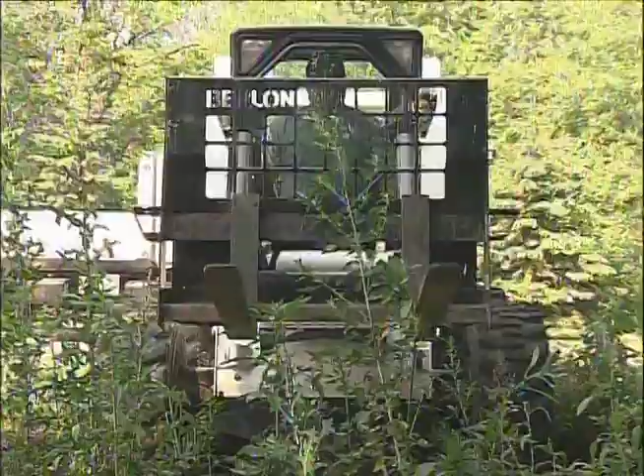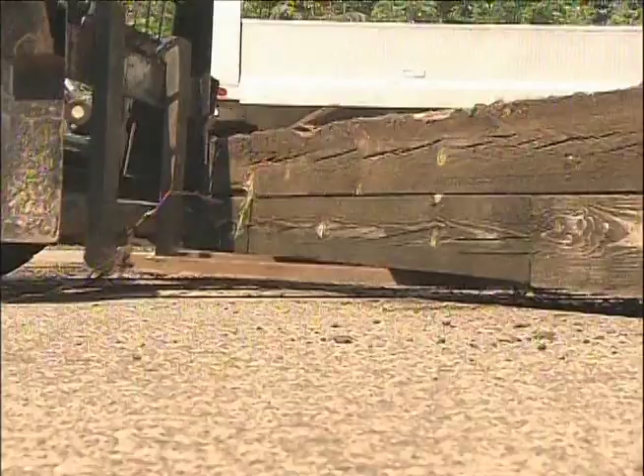The most important part of this area for me is to have a nice area to plant the vegetables in. Pam has already told me that I've ruined her vegetable growing season, so the sooner I get this behind me, the sooner she might forget. Well, Steve's been a buddy of ours for years. In fact, he's worked on a lot of our projects. First time we've worked on his yard, though, so it'll be kind of interesting to see what he's got cooked up.

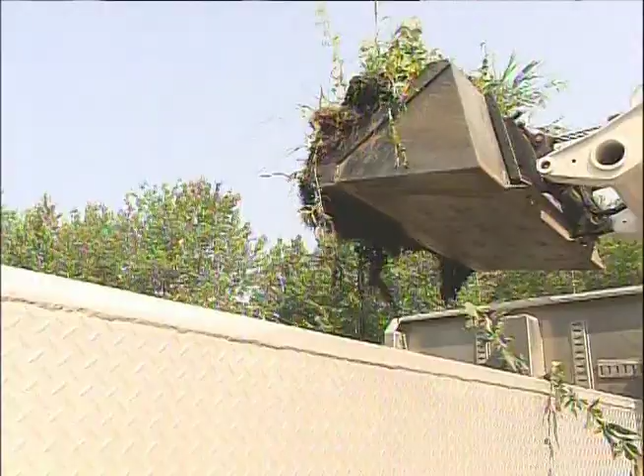We've already removed the planters. Once we get all the sod and the planting stuff out of here, we'll start excavating to get the base material in. Pam and I decided that this is kind of the basic design. The main area here is going to be concrete pavers. We've got a V-shaped three-tiered planter, and we'll incorporate a boulder right in the crotch area or the V area of the planter.

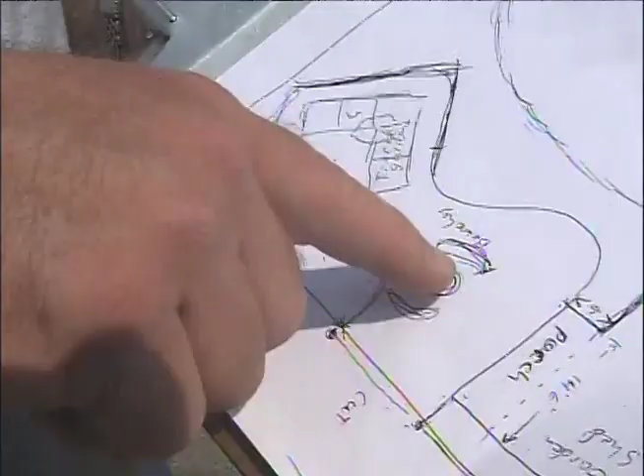Here we're going to be doing a round planter with a gazebo over the top. Somewhere over here we're going to end up with a fire pit with some seating benches around it. Once we get the pavers laid out, we're actually going to be setting in natural stone slabs. It'll help break up the continuous look of the pavers.

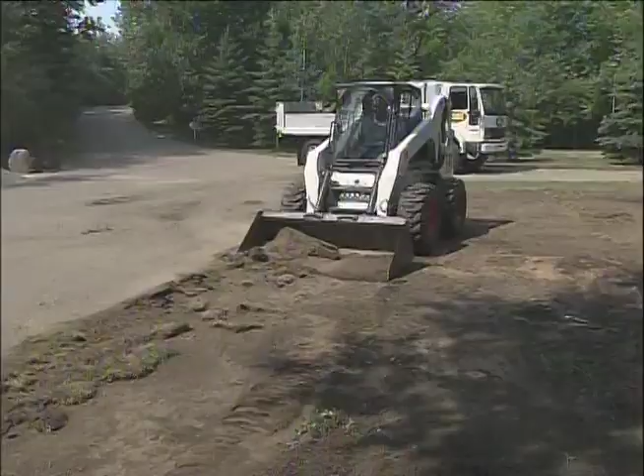This area always looks kind of scruffy. The grass is always dry over here, and making it into more of a seating area, a play area for the dogs, and just overlook the pond will be very nice. Well, once we get all the sod ripped off the top here, then we'll lay out exactly where the planting bed's going. If I know Steve, he'll probably be out there with a red spray can, laying out exactly where it's at so he doesn't have to over-excavate for the base.

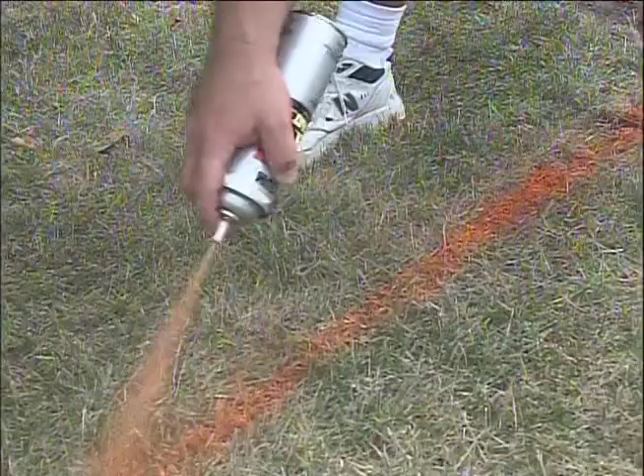Well, it's always good to get your layout done so that you really have a plan to work to. Since this is mostly freeform and there are no right angles, no perpendiculars or anything for us to worry about, we're going to go ahead and just freeform the entire perimeter of the patio. I know at one point we were laying this out yesterday wondering how Steve's going to do it, and he says, well, one thing is I got to check with my wife, because like Judd always says, if mom is happy, everybody's happy.

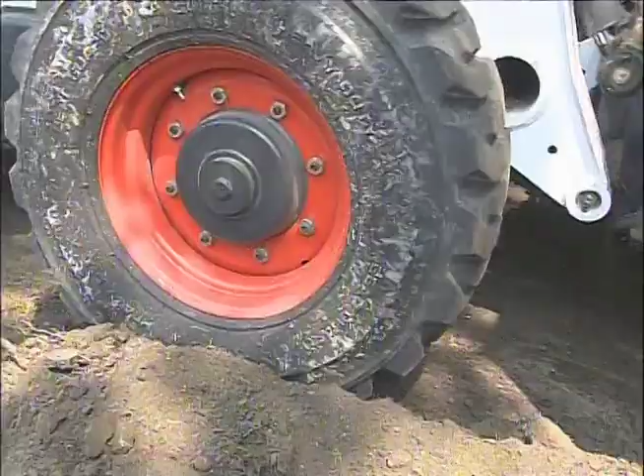It's not a bad soil here, so for the excavation we'll be looking to do about 6 inches of base, so it'll be a total of 9 inches of excavation. Drainage is always the biggest issue with any kind of pavement, so we want to make sure that we have a minimum 2% grade to make sure it sheds water properly.

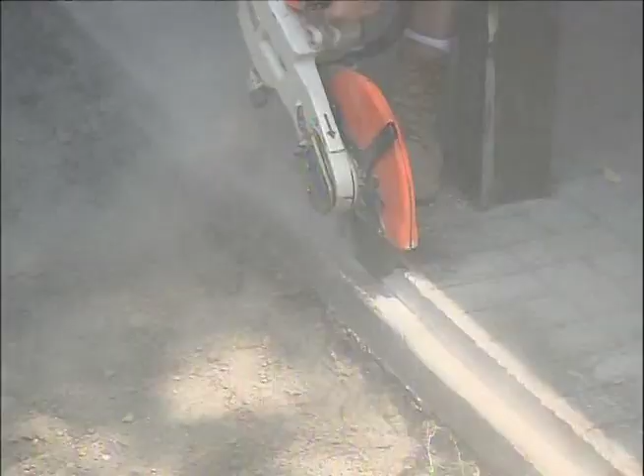Well, a couple things had to be done here before they're ready for base. One is a little bit of a surprise. There was a concrete ledge sticking out here underneath this patio, so they scored the top of that and busted that off. Another thing they want to do, they've snapped a chalk line. They're going to cut this edge of the driveway right here so that it lines up with the existing paver patio. Nice job, Steve.

Hey, they had to know they couldn't keep me out of these toys today. We got this sweet dump truck, big aluminum box, Steve running a state-of-the-art skid loader, laser levels. I'm in heaven, baby.

Okay, we've got everything excavated. Now we're ready to move on to the base. Now, one thing I know about Steve, he totally believes in good firm foundations for these patios. So putting in a good base is something he's not going to gloss over.

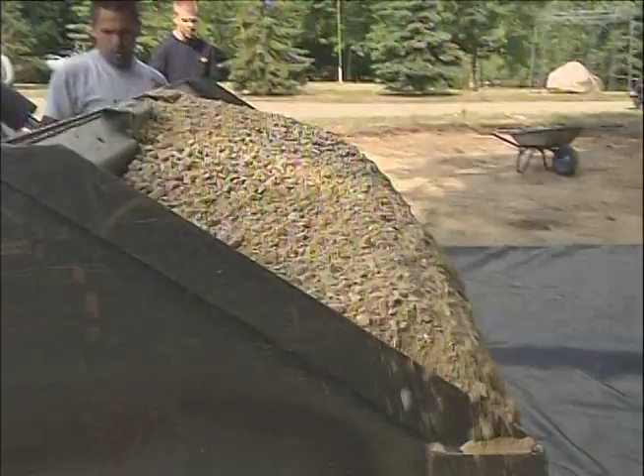We like to use a woven geotextile fabric. That material really helps spread any uneven loads you may get from the subgrade during freeze-thaw conditions or any unexpected load. As you put multiple pieces of geotextile together, you want to make sure that you shingle it or overlap a minimum of 12 to 18 inches because that's what continues the transfer of load.

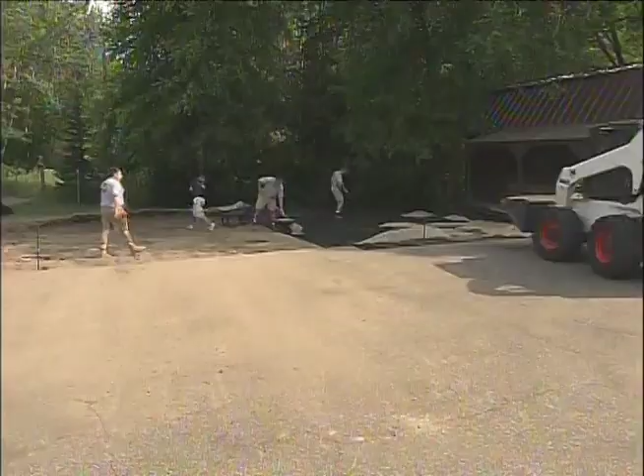We're using 3/4 minus for the base. We're spreading it out right now just to hold down the fabric. Once we get this intact and in place, then we can start spreading this out evenly throughout the whole area. It's a crushed limestone. It's got fines and materials up to about 3/4 of an inch. What that does is it binds together really nice. The one thing it's going to require us to do in this very hot and sunny day is that we're going to have to add a lot of moisture to it in order to get it to compact properly.

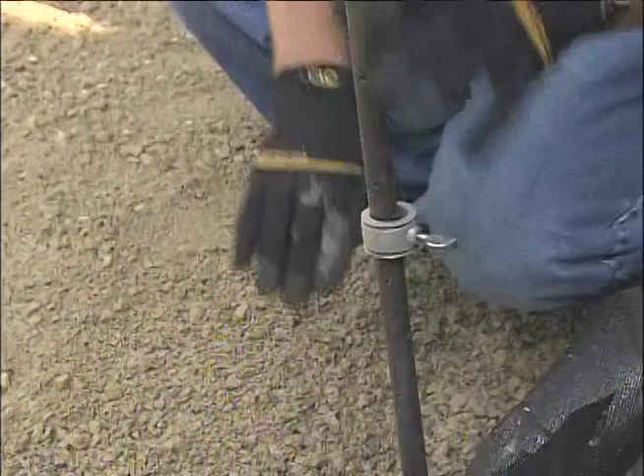Now once they get the base spread out, they want to double check to make sure they're pretty close to where they want to be. So to determine that, they put these stakes around the perimeter. They have these little collar ties that represent 12 inches above where that final patio level should be. So to determine where the grade is at, they measure down 12 inches plus 3 inches for the width of the paver, string some lines. Back on the back side there, they're probably just a little high, so they're going to scrape some of that off. Up here in front there, they're pretty darn close.

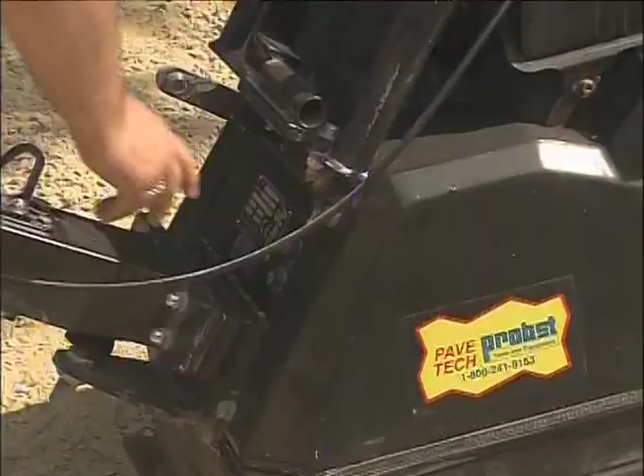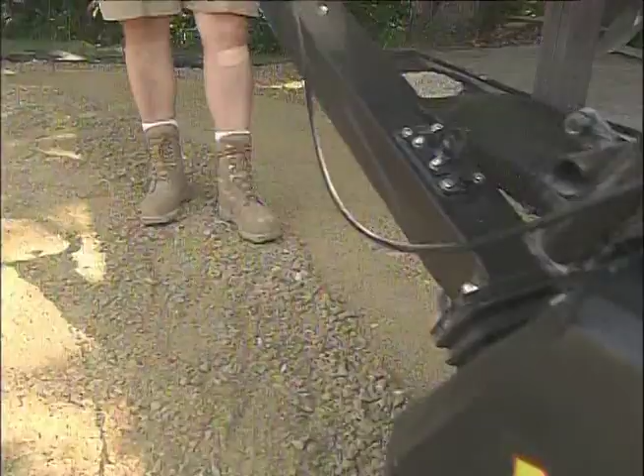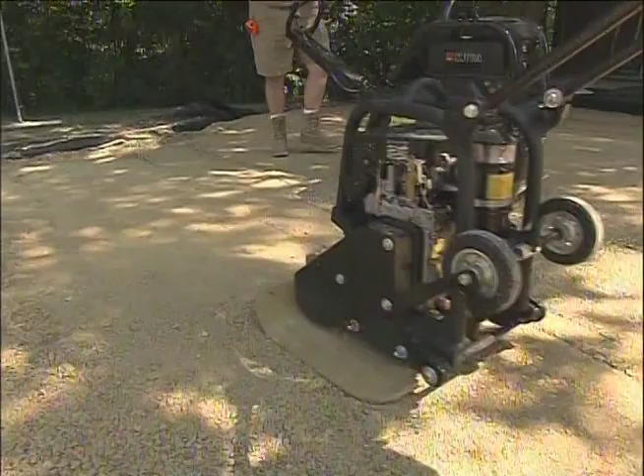Now you want to compact the base so you get a nice strong foundation for the patio, and it levels everything else, so we're all ready for the pavers. Compaction is probably the single most important process in putting a segmental pavement together. It's the foundation, it's what everything's built on. It's important to make sure that during the compaction process you're raking down the high spots and filling in the low spots as you compact, just to make sure that you're getting uniform compaction and you maintain that initial grade you got with either the rakes or the bobcat.

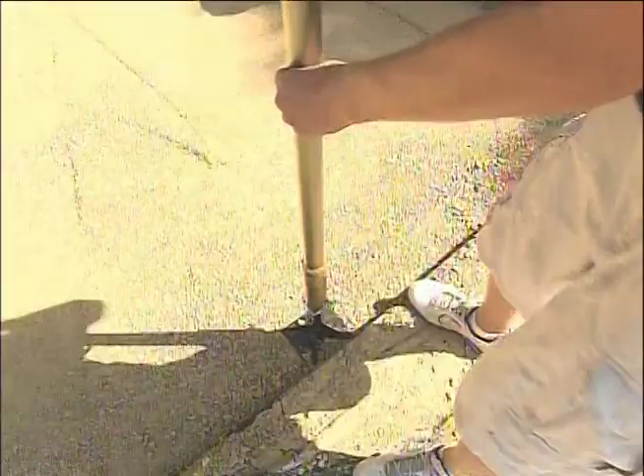Well, things are well underway now. We'll let them wrap up this part of the operation, then we'll be back to start working on planting beds and benches. Some details in this are a little bit more intricate, but pretty much this is pretty standard fare for a retaining wall project.

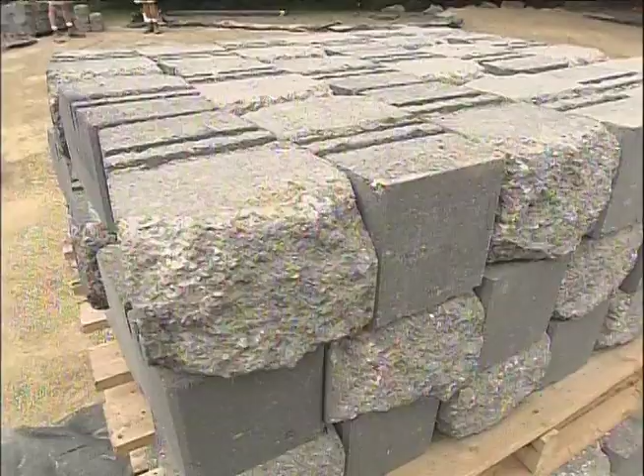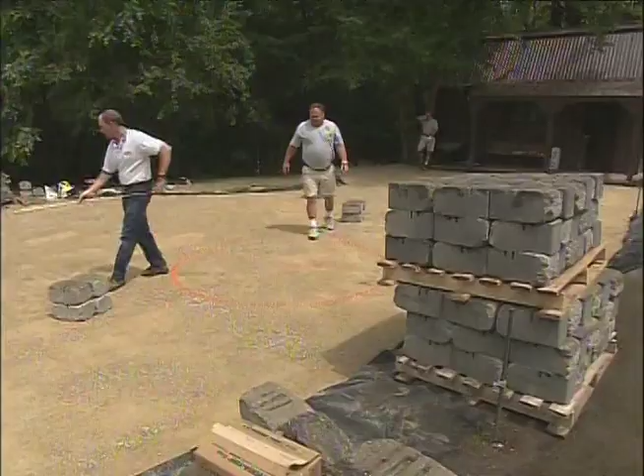All right, most of the base is set, ready to go for our paver patio. But before we get to actual pavers, we're going to raise some planting beds with some retaining wall block. Now this area here has been set a little bit lower and pretty much flat for that. There are a couple of points that we're going to have to make sure get consistent. We've got a couple of walls that are paralleling one another, so it'll be real important to make sure that those are parallel and also level in the same plane to one another as well.

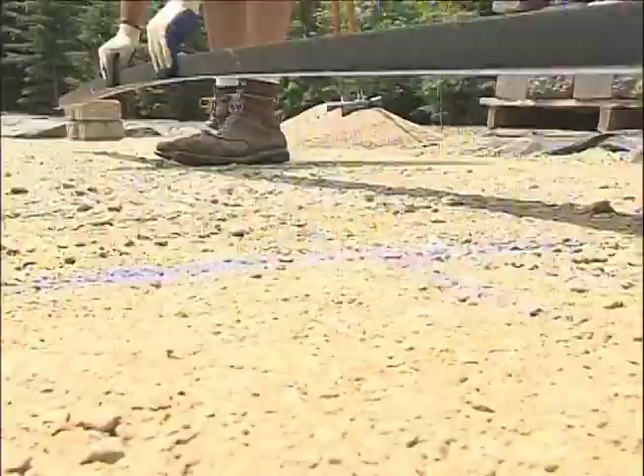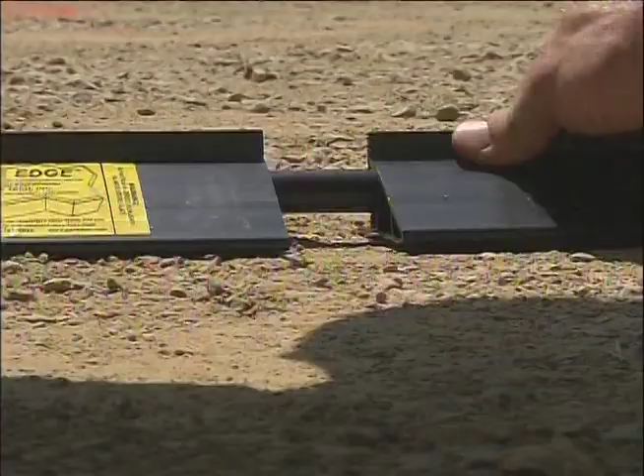We are huge believers in using edge restraints to help keep a paver patio locked into position. But Steve also recommends using edging to help hold a retaining wall in place while you are stacking the stones on top. It actually reduces the amount of excavation and base preparation necessary for the retaining wall. Again, it saves a lot of material too, because it requires you to bury less of the material below visible grade. So it does save time, it saves money, and it's quicker.

Now what we're using is a concrete retaining wall block, which has been given a tumbled or weathered look on the exposed edges to give it the look of natural stone. Now, they're about half the size of your typical unit, but they are still 41 pounds, so they're nice and heavy for applications like garden walls and retaining walls. They're also pre-grooved and drilled so that you can put them in a variety of configurations, which you'll see in a little bit here as we start to lay the stones.

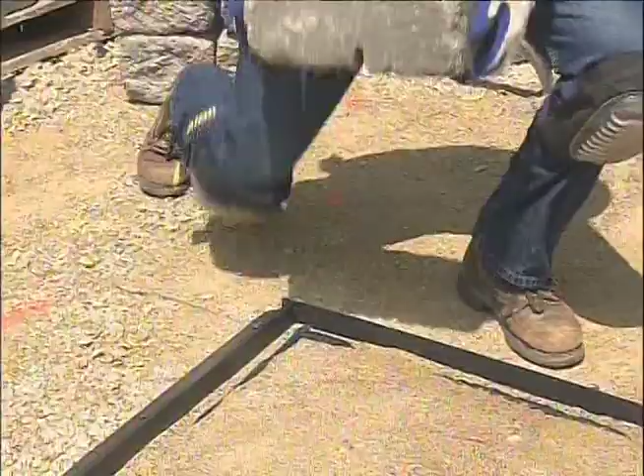We chose this material because it is easy to work with. It's small enough for us to do all the design features we want, and the fact that it's a solid block gives us a lot of ability to cut and fit pieces to make it look really nice.

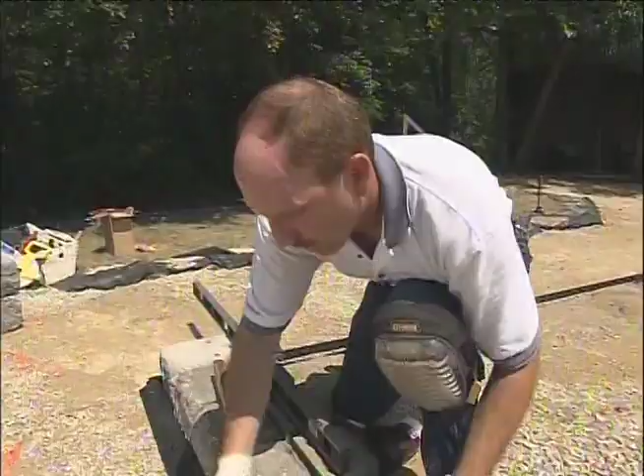Now Jay likes to start in the corner and work his way around. Ready? So that's what he's recommending here. Now with any retaining wall that we've ever done, the first course is always going to take the longest because you need to make sure that every single stone is perfectly level and straight, otherwise you're going to run into problems later on. We start in the corner of a project because it makes things a little bit easier. This will be a fixed point for us now.

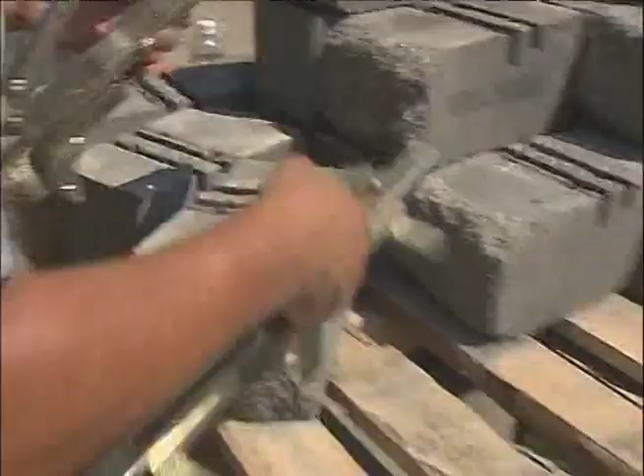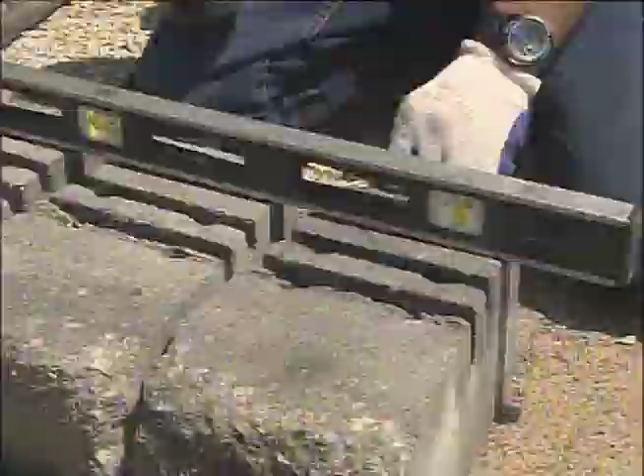You normally start in the lowest portion of your wall and also in any corners. We've split a standard Versa-Lok block in half to give two textured faces, an 8-inch side and a 12-inch face. In addition to the Class 5 base, we also are using a little bit of washed concrete sand as a skim coat, if you will, to aid and speed up our basing operations. It's very thin. We just spread it out very thin to take care of any low and high spots.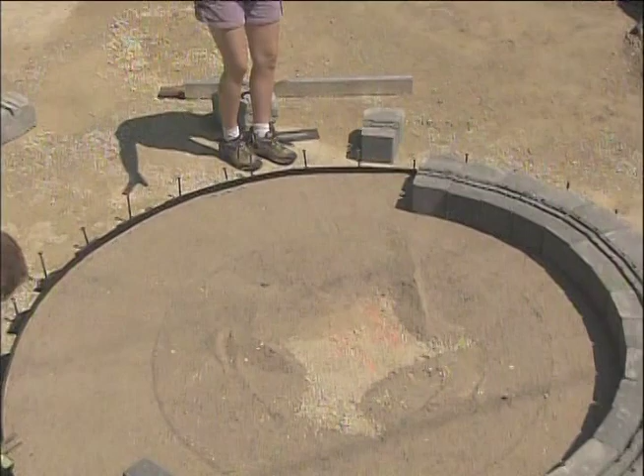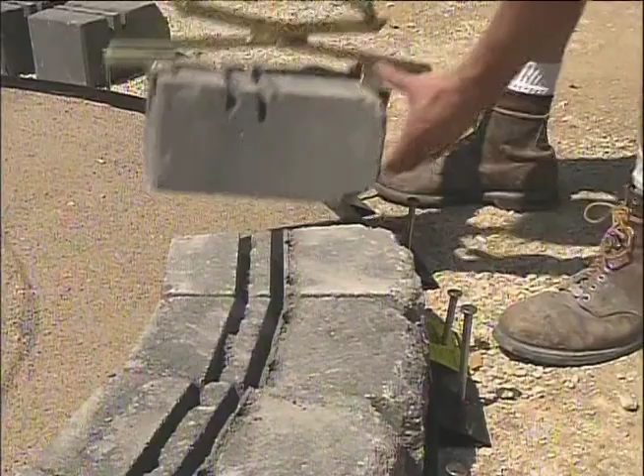Well, the first bed we had multiple corners, but here no corners at all, just one big circle. Now with the blocks cut narrower in the back than they are in the front, it makes it pretty easy to get the right radius. The base course is the number one part of the job. You want it just perfect. You want them level, tight, and if it isn't right, you'll hear it.

Now once the first course is set, we can go ahead and continue with the second course. It starts in the corner. There you go. And it goes kind of in an interlocking or weaving pattern. Now I noticed you're putting a little bit of glue on this corner piece, Jay. Yep, and the reason we're doing that is this is a top-down pinning system, and these corner units, we don't have any slots up here to be able to pin to. So we're going to go ahead and use some good quality, flexible concrete adhesive to hold those in place.

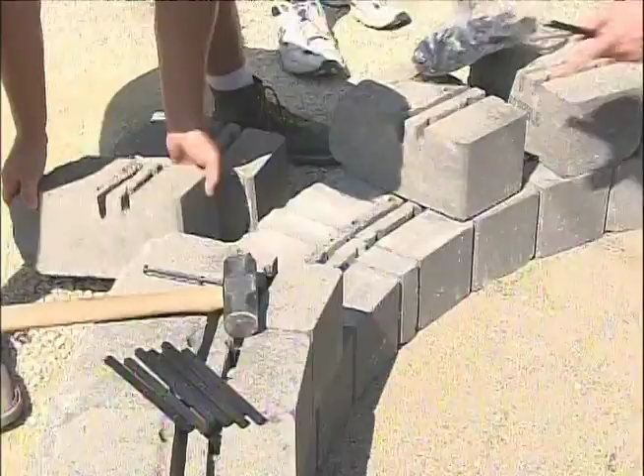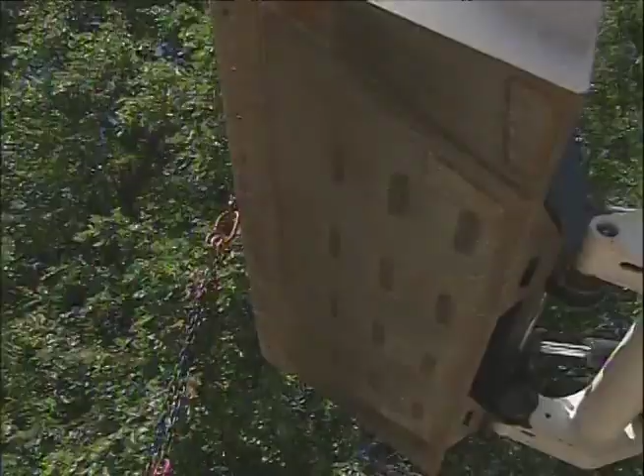Once you get the base course in, the second, third, and fourth, or however many courses you're going to go, they fly. And that's when you see the progress happening. With some prodding, the homeowner liked the idea of incorporating some natural stone into an otherwise concrete jungle, if you will. We've got a concrete retaining wall, concrete pavers are going to go in. So adding some natural stone is going to give it some real interest and make it really unique.

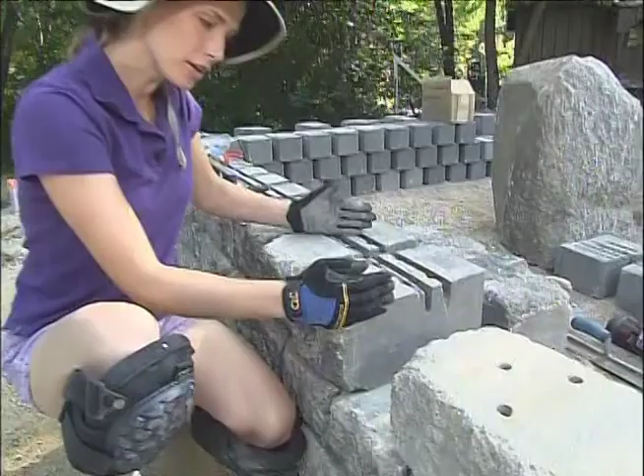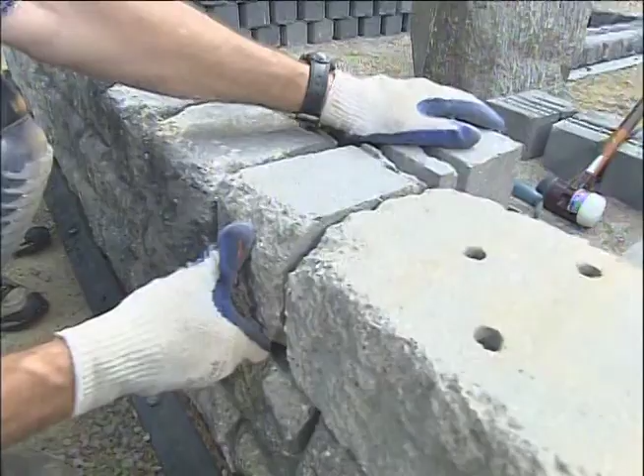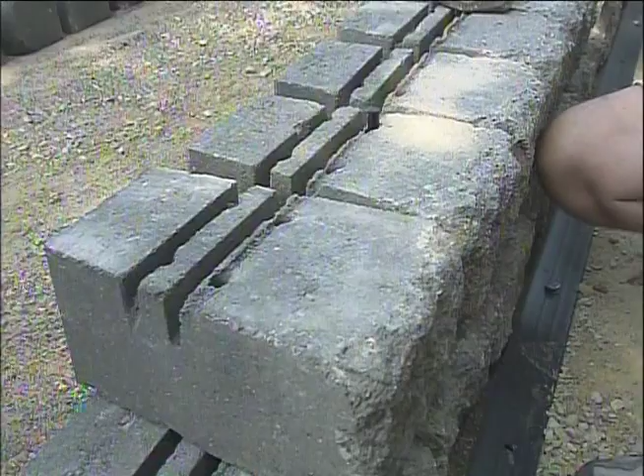Now I have a 3/4 of an inch setback here, which means that each course is going to get shorter by 3/4 of an inch on both sides. So a full piece isn't going to fit here, Jay. So what do you have for that? To fill that space, we are going to cut a slug, which is just a piece of another block, at least 4 inches wide to be able to fill that space. This is a really slick system. To achieve our 3/4 setback, you take these little pins, drop them in these holes on the top of the block, give them a tap, they pop in, automatically set your 3/4 back, you just keep on going.

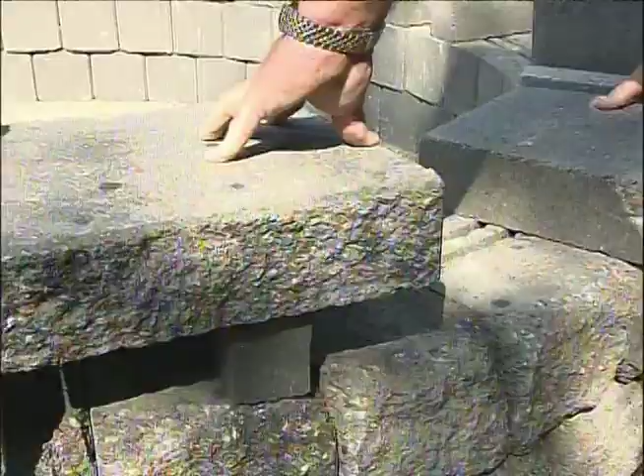All right, the system we're using comes with a really good looking cap piece. And generally we wait till everything is done before we start working on that. But since the round bed is all finished and every other piece needs a couple cuts, we're going ahead and starting on that. We cut both sides of every other cap, which gives it a much better look than trying to cut one side of every cap. It's mainly for aesthetics more than anything else.

Well, that's pretty much the story with the planting beds. A little more work yet to do here, and then we'll get started on those pavers.

The biggest trick to setting this stuff is making dang sure Pam is happy. Pam's happy, therefore I'm happy, everyone's happy.

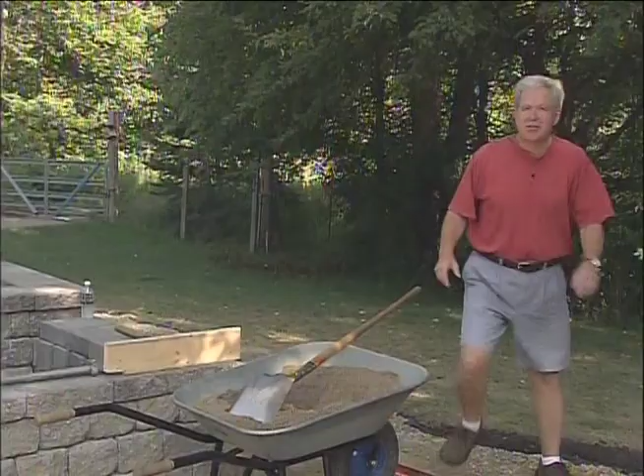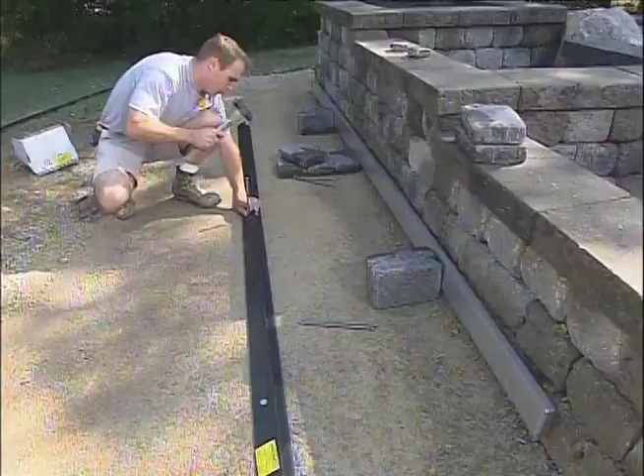Okay, we've got all the planting beds done here. The guys have had a chance to come in and lay down some more base here to cover up the edging that holds the retaining wall block in place. Over here there's a couple of curved freestanding walls. This will serve as seating around the fire pit area. And they've got some of the sand down now, the edging's all in place, and they're starting to lay some pavers. Well, it's important to put the edging in ahead of time, especially if you have a lot of complex curves like we do on this project. It just allows you to frame the job.

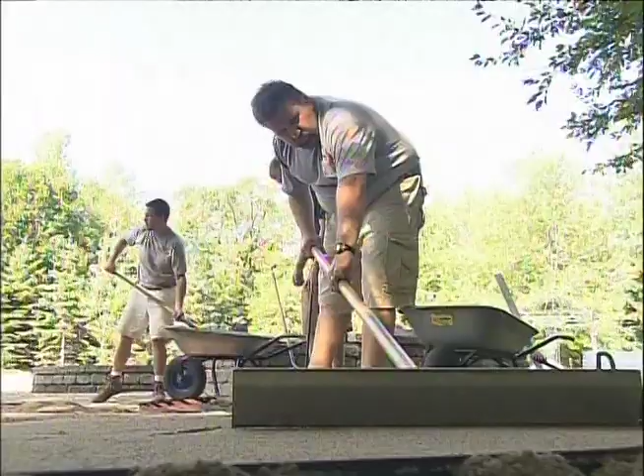All right, moving on to the sand process. You need a good inch of bedding sand, screed it out nice and smooth to set your pavers on. Now the best way to do this is just dump a bunch of sand right over the base, spread it out, and run your screed over a couple of 1-inch pipes to achieve the proper height.

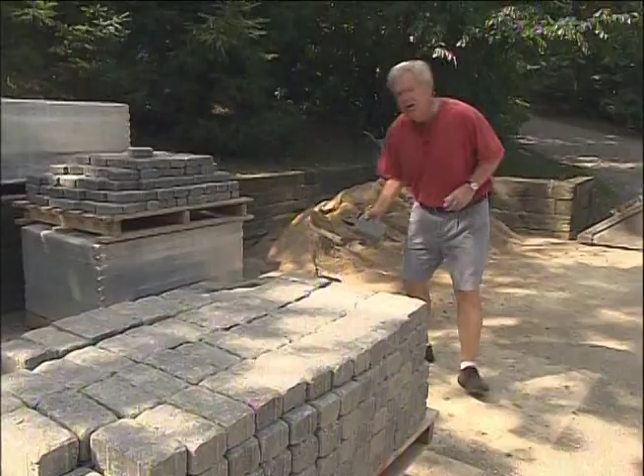For the patio, we're using concrete pavers. Now these are formed and tumbled to give them kind of an old world look once everything's put together. We're using 4 different sizes, a 4x6, a 3x6, Lenny likes calling these Twinkies, a 6x6, and a 6x9. Now because we are using quite a few different sizes, we can go with a lot of different patterns.

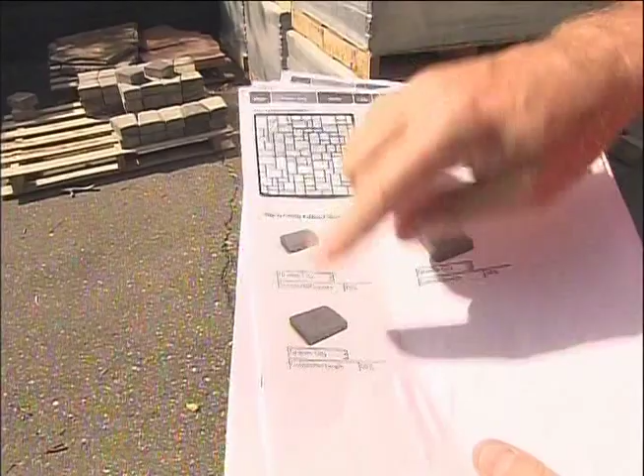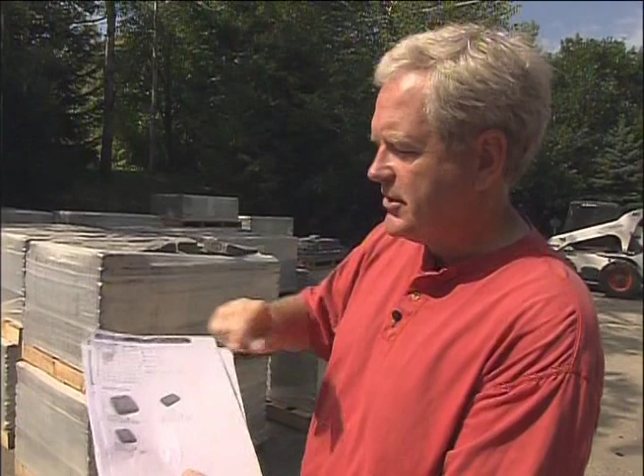And you can go to the manufacturer's website, they have them all laid out. Some are fairly straightforward, for instance like a herringbone, this only uses one. Or you can go with something that looks totally random. Here they're using 3 different sizes, or something like this one. Now what's great about this is you apply the square footage from your patio to this pattern and it will calculate exactly how many you need of each size. So it makes it really pretty simple.

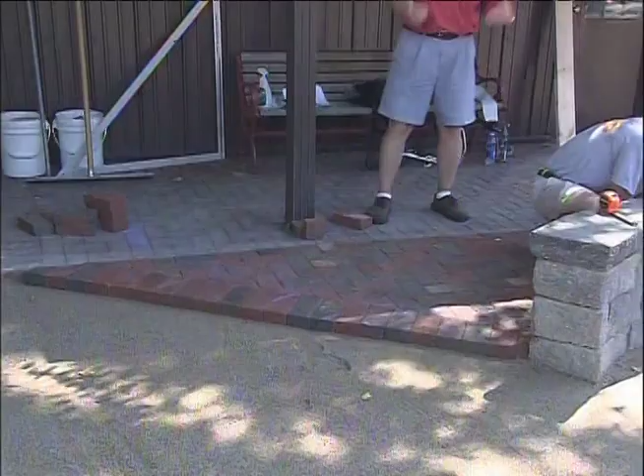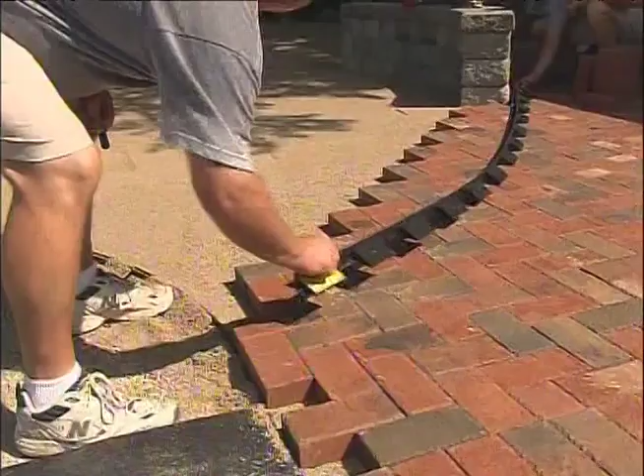The new concrete pavers are going to butt up against the old clay brick pavers. We could do it along the old original line, but I think that would look a little harsh. So Steve has some of these pavers left over. He's going to extend the patio out a little bit and then do more of a natural curve break. I think it's going to look a lot nicer. Because of the features of this, the curved benches and some of the other features, felt it was important during the transition rather than have a straight line is to provide a curve. I think that'll make for a much gentler transition from the clay to the concrete.

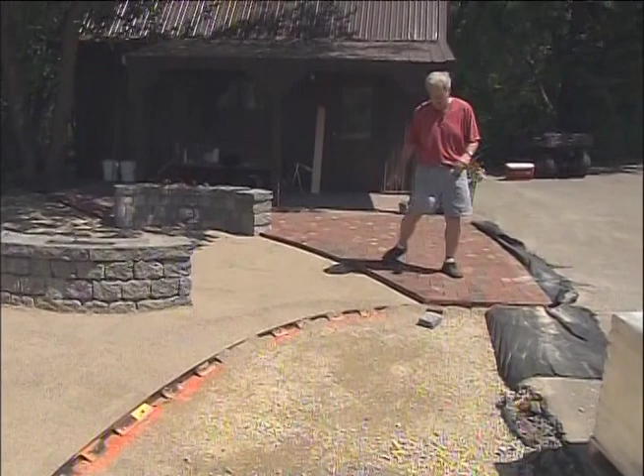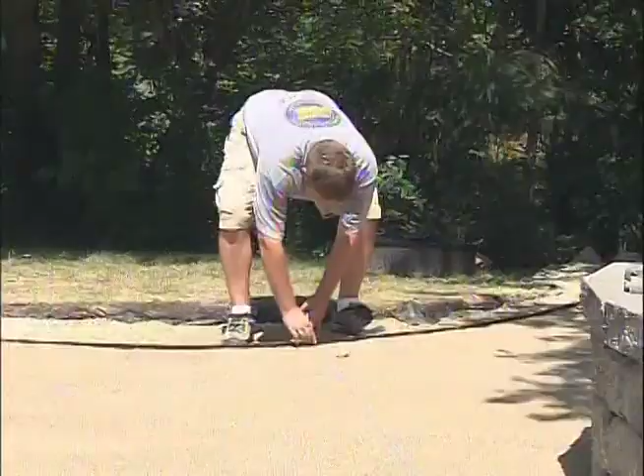All right, the new concrete pavers will have a soldier course running right next to the soldier course of the brick pavers. Logical spot to start? Well, not really, because the guys want to make certain that our pattern, even though it's very random, runs perfectly parallel to the cut in the driveway. So what they've done, snapped a chalk line over here, another chalk line perpendicular to that. They'll start laying the pavers out there in that area, and then they'll start working off of that. This way, when they're done, they know that everything will be running perfectly parallel. They don't have to worry about anything drifting on them.

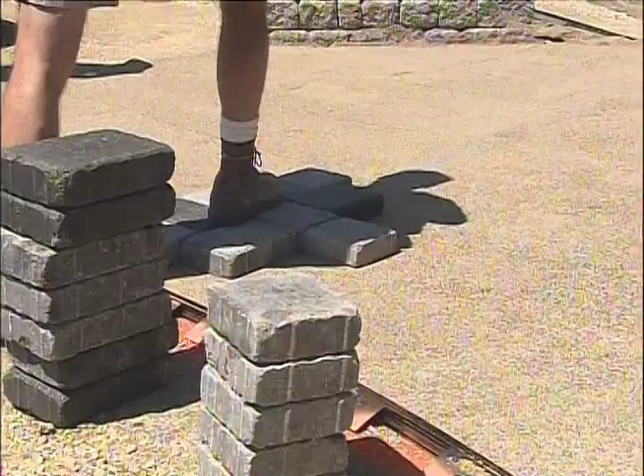Probably the biggest don't do is rush it. When you're laying the pavers, bond lines are absolutely critical. Snapping chalk lines, running string lines, these are very important. Too many times people are more worried about getting product down than they are worried about moving ahead in an organized fashion. And it's really not a speed race.

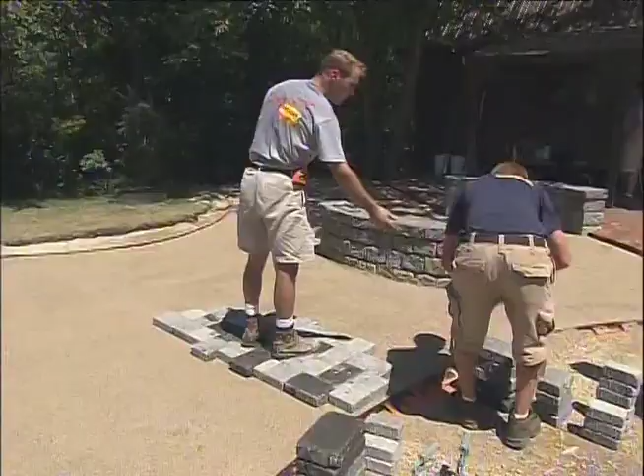As we mentioned before, there are patterns available. Now Bob's done this quite a bit. He's not worried about using one of those patterns, so he's just doing something totally random. It's not hard to do random. You try not to think about it. The important things are you don't use too many of one size, otherwise you run out and have to order more. Delays the job. Also, you gotta be careful that we don't have too long bond lines. These continuous bond lines need to be broken up. Really shouldn't extend more than 5-6 feet.

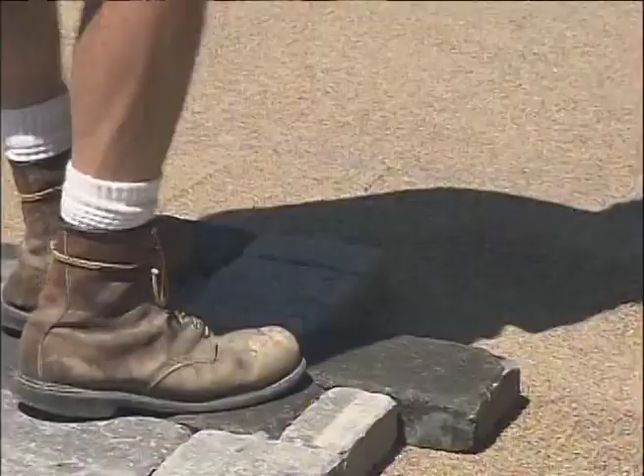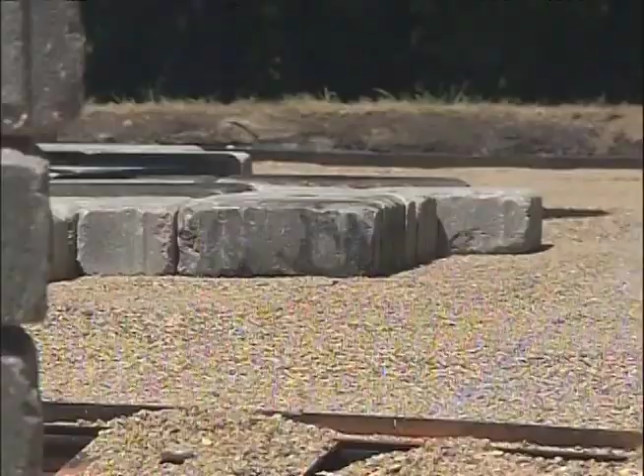My 3 unfavorite words in the world are click and drop. It's a problem when we have homeowners and contractors hearing that term because they click, upset the bond pattern of the pavers around them, and then they drop them in the sand, which displaces sand. So by the time they're finished, they have a very uneven surface, and the bond patterns are spread all over heck. So really, the best paver laying guys I have ever seen are guys with perfect finesse. So if you've heard the term click and drop, forget it. This is all about finesse. Do pavers just the way Bob does. You have a nice tight paver patio. Well, a few more pavers to go here, and we're on to our last finishing touches.

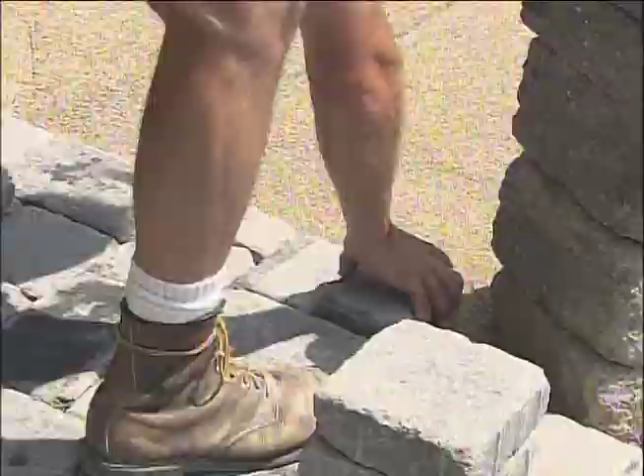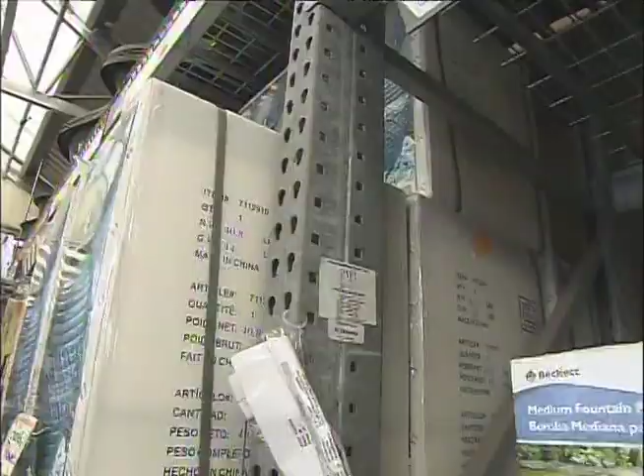Well, so far, it's been a lot of hardscaping down at Pam and Steve's new patio, and even though it's a little late in the year for planting everything in the new raised beds, they thought it would be really nice to add a water feature of some sort here. Well, one option would be to set up a water garden with a pond liner, a waterfall, and a pump. Wouldn't be that hard to dig out and set up. You got everything you need right here, but I know that what Pam and Steve are thinking about actually will sit on top of the pavers and not in the ground. And that's where they got the idea of a fountain.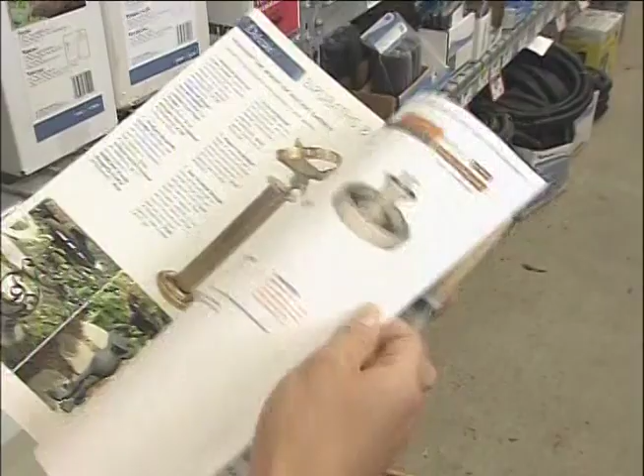Now it's great because a fountain comes with everything you need in a box. It looks like concrete, but it's actually made with a lighter resin material. But the only thing is they wanted something a little bit bigger than what they have here. So they went online and they found this urn pool, which is about 3 feet high and weighs about 85 pounds. But like the smaller ones, it all comes in a box. As they say, some assembly is required. It's pretty easy though.

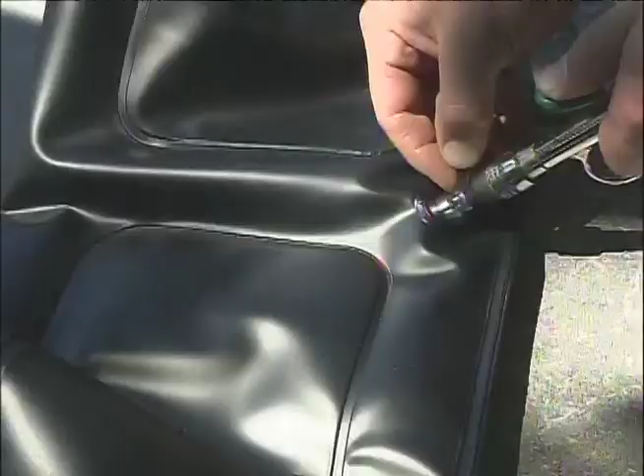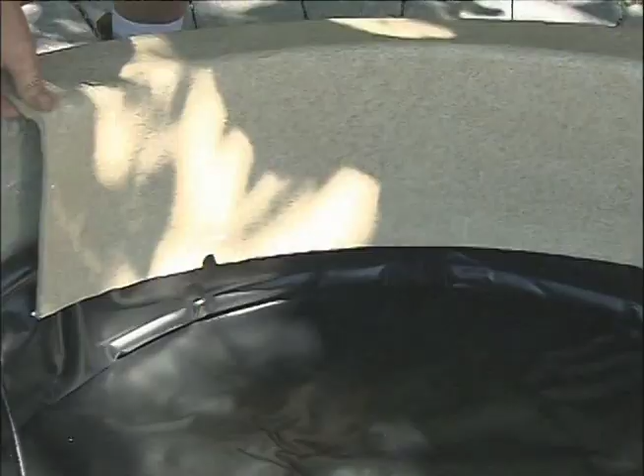The first step is laying out the PVC liner where you want to position the fountain. The liner serves as the bottom of the fountain, but once you pump it up, it also forms the sides. You set the water pump right in the middle of the liner, and there's a decorative surround that you set over the sides. It comes in 4 pieces, which you put in one at a time and line up over the sides. The upright portion comes in 3 pieces, with the water supply tube run up through the middle piece, which looks like an urn.

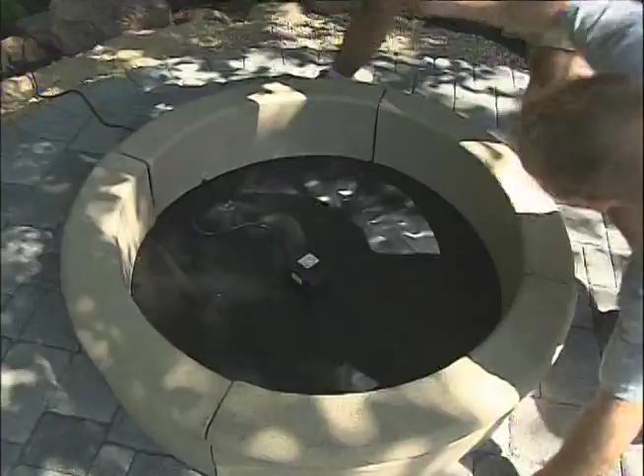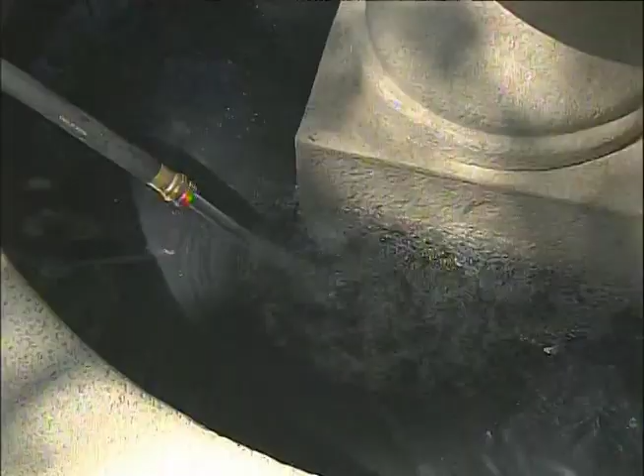Turn the urn upside down and you can attach the base, which locks into the bottom of the urn with a little twist. You set the base and the urn right over the pump and connect the supply tube to the pump. Then you can set the top piece in the urn and lock that in place. Now you're ready for water. It's a recirculating pump, so you just fill up the pond liner from a garden hose, one time only except for spillage or evaporation. Plug in the power cord, and the pump sends water up to the urn.

It takes a little while for that to fill up, but once it does, it spills back down into the pond liner. And before you know it, you've got yourself an instant water feature complete with the relaxing sound of a gurgling fountain. The beauty of it is, once it gets too cold outside, you can literally take the fountain apart and set it up inside and enjoy the fountain all winter long. So, with the water feature all taken care of, just a couple more things to wrap this project up.

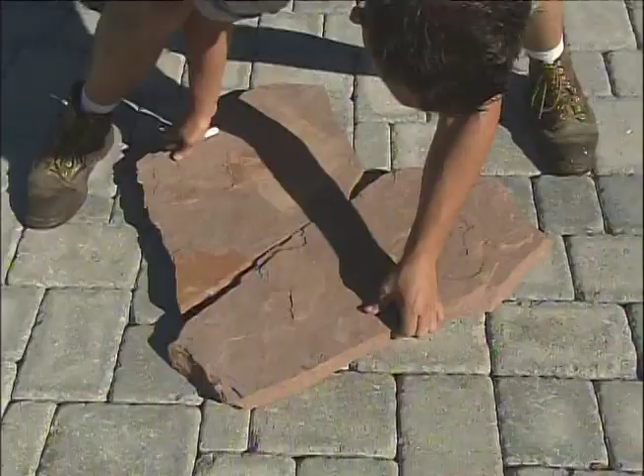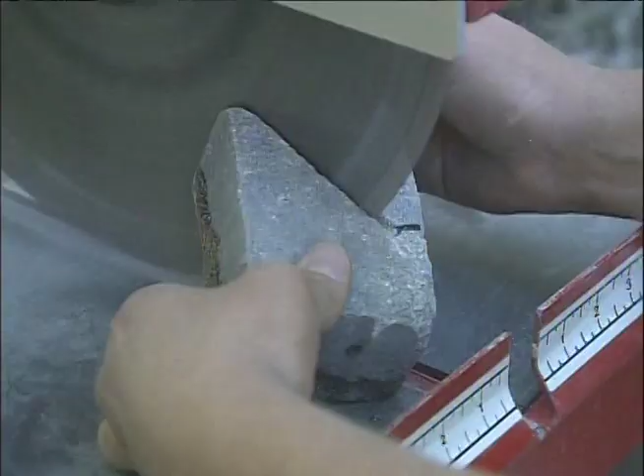Well, it's been a busy couple days here finishing up the patio with our pavers and a few interesting features. One of the things we've done is we've put this natural stone here in front of our round planter and then accented this with single stone pieces scattered throughout the patio, cut right into our paver pattern. The way to do that is to first set the pavers in place and set the stone right over the pavers. You can then mark the outline of the stone on top of the pavers, carefully pull them out of place, making sure you mark each one so you know where it goes. Cut those according to the marks on each one, reset the pavers, add a little sand or base to accommodate any difference in thickness, and then set the stone in place.

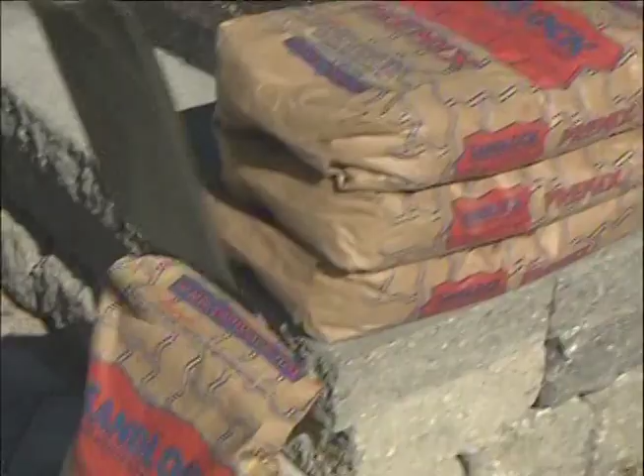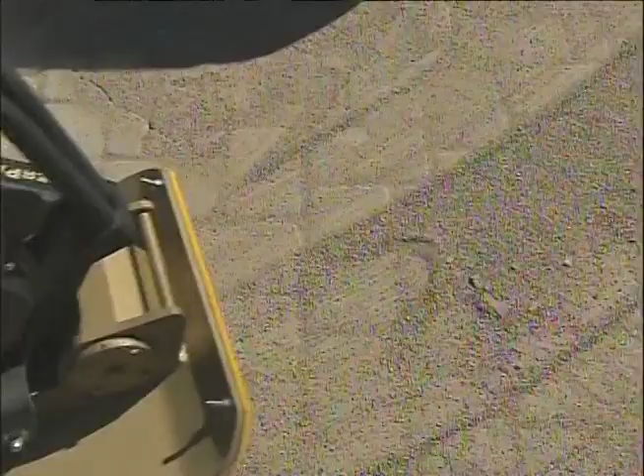After that, there are just a couple more steps to wrap things up. Like sanding the joints between the pavers. That's a critical step in creating a monolithic surface with interlocking pavers. You sweep the sand over the joints with a broom, run a plate compactor over the pavers to vibrate the sand into the joints, and then you repeat it as needed to fill the joints with sand and lock the pavers in place. We also spread topsoil or black dirt over the back side of the paver edging. That way grass can grow right over the edging and fill in where the lawn was cut back during the excavation. And we set the steel gazebo in place over the rounded planting bed to finish the hardscaping. Perfect.

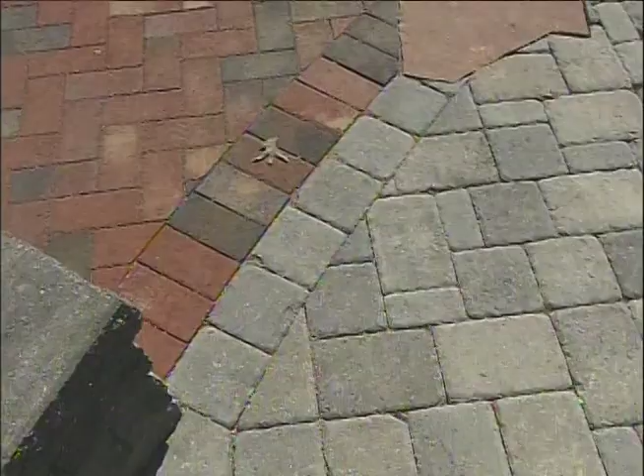So with the fountain up and running, the only thing left to do is to put some nice plantings in these raised beds. And I know Pam will be doing that soon, so other than that, this job is done. We started the show with a fairly nondescript patch of lawn bordered by trees, pavement, and a tool shed. Not really much to catch your eye. But now we've blended a new tumbled paver patio with the existing clay brick apron, added raised planting beds with retaining wall block, worked in natural stone with pavers, and created a fire pit by cutting a metal fire ring into the pavers and lined the outside edge with a circle kit of matching pavers.

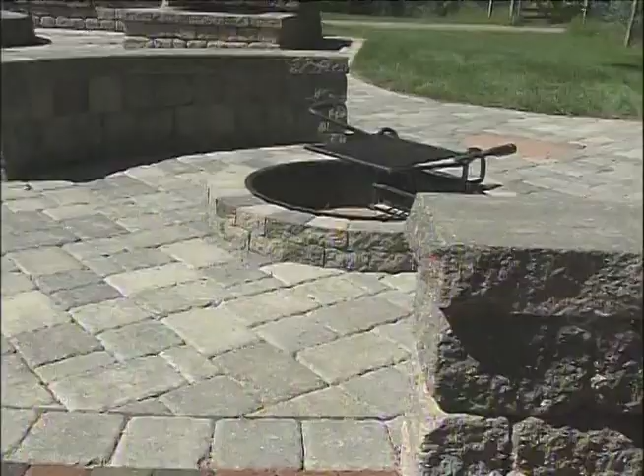This is so much better than what we had before. I mean, it's cleaner, it's easier, and we can have a place to sit and have a fire when it gets cooler out. The single neatest element that we introduced was finding that one rock over there for the retaining walls, because that thing, it blends with the color, it blends with the texture of the retaining wall, and it helps tie it all into the pavers in front of it. I think that's probably the single neatest feature of this patio.